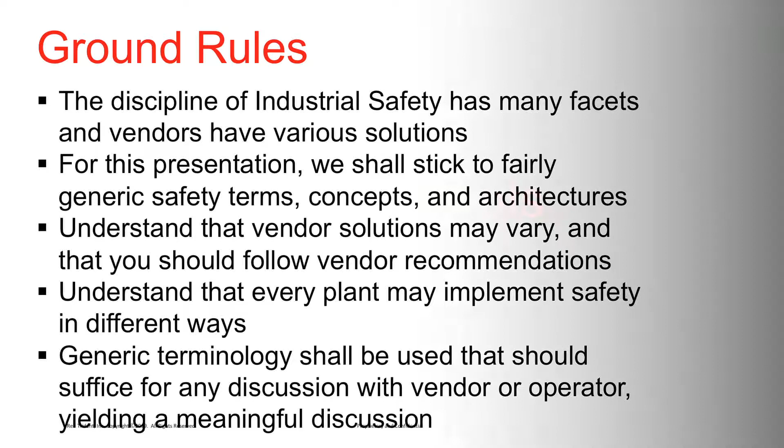Okay, planned downtime, not a bad thing. We say, hey, we're going to shut down for 3 weeks. That's built into the schedule. Everybody understands that's coming, not a big deal. It's the unplanned maintenance that's the problem. That's when you have issues that actually go wrong on the plant: machine breaking, product quality issues, all kinds of things like that. And when I see a company that has a very high amount of unplanned downtime, that's the first indicator to me that they probably have mechanical integrity issues within the facility.

All right, that they have something going wrong. They may have process problems within the facility, or operator training problems, or something of that nature. But that's the first question I look for.

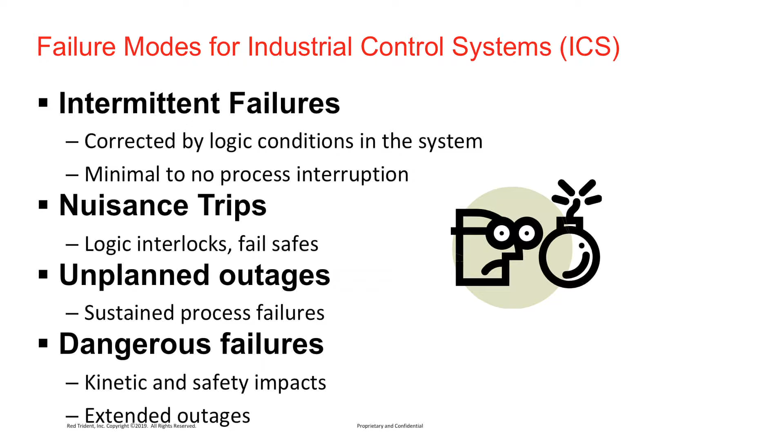And then we get into the worst category, which is actually kinetic and safety impacts, or dangerous failures. Now, I want to make sure we're really clear here about safety. Safety, hold on just a minute, okay? Don't anybody throw anything at me. Safety, by and large, only deals with one thing: entropic hardware fault.

In other words, something happens - it's mechanical, it's not deterministic in nature. Now, I realize all the safety standards say, yes, we deal with systematic fault, yes, we address security. And I look back at them and say, no, you do not. They all say in there in one line, you need to be cyber secure. Boom, that's it. Now, some of the standards are starting to adopt that a little bit.

But process safety, by and large, is just meant for entropic hardware fault, simple things like random acts of nature. Process safety is the process of identifying the probability - again, entropic hardware fault - of failures in equipment and machinery that could result in damage to personnel or equipment, and then reducing that probability to acceptable levels. That's it. It's all math.

So you go in and do a study - a HAZOP study, a hazard and operability study, a process hazards analysis - you do cause and effect diagrams, modeling all the different things that can happen in a process, and you measure the probability of this piece of equipment or system or component failing. What is the rate of occurrence per hour that we expect this device to fail? We call it the probability of failure on demand. Now, you can do that by testing the device.

You can hammer the device for a long time or leave it out there running. Think about it - if a vendor sells 35,000 SIS systems and deploys them all over the world, it's not going to be long before they start getting feedback about how often those components fail. They can work that back into their equations, or from an engineering, design, and testing perspective, measure what this failure is - probability of random hardware fault for the most part - then design the system to reduce that probability of failure per hour to an acceptable level. That's the whole SIL concept, which we'll talk about. Primarily just entropic hardware fault.

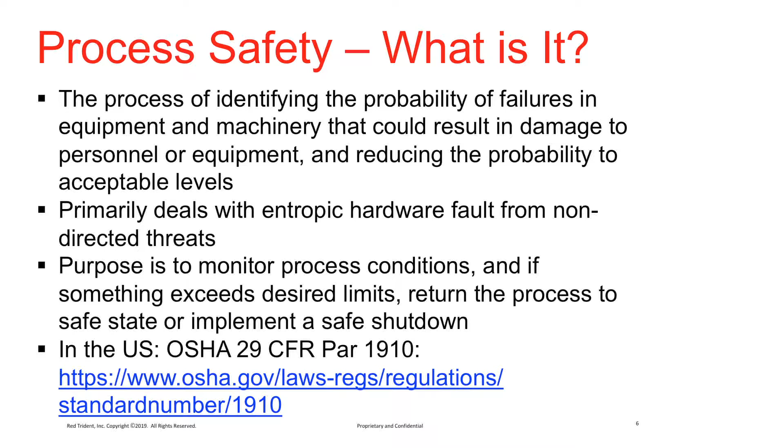Something got said at this show - I won't embarrass the individual, but I'll mention it. Right after I'd started doing a lot of this research, someone who was a researcher in the community said, 'Oh, when the process controller sends the command to the safety system to implement its function...' and that was like fingernails down the chalkboard for me. I'm like, whoa, that's not how these things work. He was doing research on these components at this point. When we talked to him, I said, look, safety instrumented systems monitor the process. They don't interact with the PLC by and large. Now, there are some exceptions in the vendor world, but the safety system monitors the process conditions, looks for unsafe conditions, and tries to resolve them.

So how is this managed? Safety on the whole combines physical infrastructures and safeguards, and process control logic - what we call soft interlocks. A soft interlock would be, say, your PLC logic: if temperature sensor is greater than 200, then reduce the burner, or if machine speed is greater than some speed, reduce the machine speed. Those are overly simple examples, but the idea is you have logic inside your ladder logic, program, or function blocks that measures process conditions and says, that's more than we want, or less than we want, so change these things. That's an example of a soft interlock.

A better example: I was working on a conveyor system with engines on big carts that were moving. There was a light curtain between these two carts - this is where you'll hear the first security issue that comes up. The idea was somebody would come up, the cart would stop, they'd walk all the way around the cart, make changes. So the light curtain would detect there's somebody standing between these two engine carts, and if that condition was true, it would not advance the next cart.

Problem was, there was too much network traffic in the area at that particular time. The signal that there was somebody standing there was never received by the process control device - bad logic, don't get me wrong, but the signal was never received. Carts moved at an unexpected time, and the woman was crushed between them. Thankfully, she actually survived with some minor injuries, but it was an example of where soft interlocks can have bad impact and bad consequence.

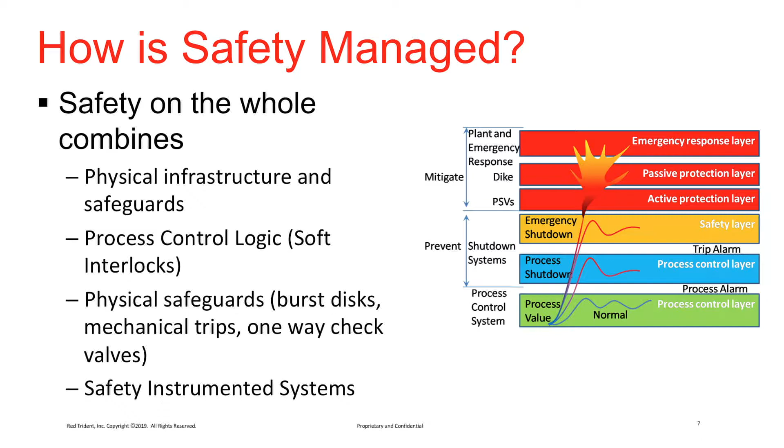Coming to terms with terms, I'm going to hit this really fast. PSM, Process Safety Management. HAZOP, Hazard and Operability Study. BPCS - that's a term we use a lot, talking about safety to distinguish between process control and safety systems, basic process control systems. I don't care if it's PLC or DCS. That separation of SCADA versus DCS versus controller is, by and large, only academic - we make controllers just as powerful as DCS systems now. So don't get tied up into that too much. BPCS works pretty well in this terminology.

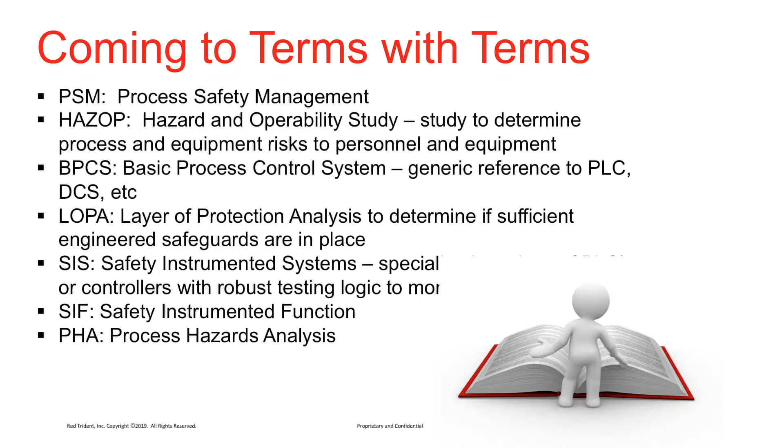LOPA, layer of protection analysis - how many layers and safeguards do we have? Safety instrumented systems, safety instrumented function, or the SIF - that's actually important. SIF is like: if pressure or temperature 1 is greater than 102, then implement the ESD function. Those are fairly simple logic. PHA, process hazards analysis, okay.

Types of safeguards - I always like this. Whenever I see people do the safety thing, I always think 'safety third' - that's one of my favorites. But okay, types of safeguards.

Physical - these are barriers, berms, blast shields, man traps, protective equipment. For example, do we go into the control room, or where the control rods are in a nuclear facility? No, we don't. We have layers of protection between us and that. We don't move them in and out ourselves - too dangerous. We have layers of protection between us and the process.

Engineered physical safeguards - these are the one-way check valves, mechanical burst discs, mechanical trips, mechanical overspeed protection devices. I'm really focused on these for rotational equipment like turbine gas compressors or turbine generators. Here's where I'll throw the first little rock: look at what they're producing out there these days - they're all digital systems now. They're not doing mechanical overspeed protection in turbine gas compressors or turbine generators anymore. And it's like, oh yeah, it's perfectly safe, right?

That's where myself and some folks in this room would be happy to challenge that, so something to be mindful of. If you say the only system we have now going forward is digital, well, it's not connected. Yes it is, it's connected somehow. It's all connected. Don't ever tell me something's disconnected, I will take you to task on it. There's always a way, right? Stuxnet proved that, Triton proved that, several other things.

Either way, whenever I'm looking at rotational equipment, these are the systems out there. We have to protect them very heavily, because if somebody can change the parameters and say it's now safe to run at 100 RPM and then 3,000, that's not a really good idea. It's going to eventually cause problems. But if I tell that system that's okay, it's never going to shut down.

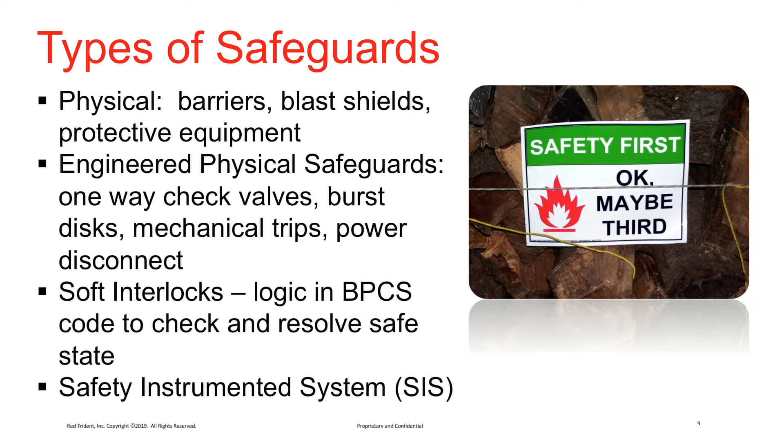Then we get soft interlocks - sorry, I skipped a little bit - soft interlocks, again those are conditions inside the controller, and then safety instrumented systems. Now why do I break those out? Safety instrumented systems are like a very robust and much more expensive version of the controllers you're probably familiar with, so they're not very cost effective to use for every control function. That's the main problem with them.

You don't see SIS a lot of places. The only place you really find it is regulated industries, where plants have opted for very robust protection. In OSHA, there's 1910.119J, if I remember correctly, which defines the parameters for mechanical integrity. So one thing you'll find is, in the United States, it's OSHA and MSHA. In Canada, I think it's also OSHA and MSHA. Outside the U.S., there are equivalent organizations. I'm just using that as one example, but I don't want to list all of them here today.

What we found out is OSHA took a look at the standards ISA 84, 61508, and 61511, and said for your regulatory component of being safe, if you implement per these standards you will be compliant with OSHA. So we have kind of a de facto regulatory requirement as a result of that. In the U.S., OSHA and MSHA, and outside the U.S., different organizations - you do have a requirement to be safe, but it doesn't necessarily mean you have to do it the 61508, 84 way. Those are just one way of achieving that compliance.

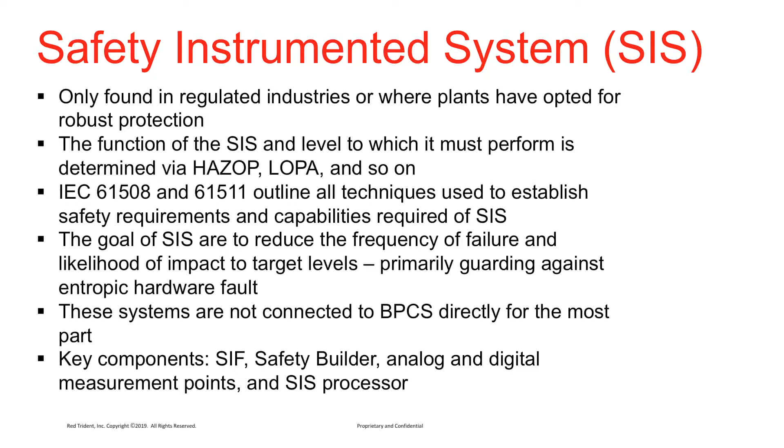Now they have the ability to modify the safety instrumented function, and they have the ability to modify the process control, the process itself. The interesting part is, with safety systems, all you have to do is disable its functionality or give it a new tolerance, and then just wait. You don't actually have to hack the process. You just have to wait for an unsafe condition to occur, right? Remove the safety instrumented function.

Okay, safety integrity levels - this is what we're talking about in terms of probability. If you look at SIL 1, the way safety works, they tried it this way - tried to say we'll make the vendors be more safe. They tried it that way for almost 11 years, and finally said that isn't going to work. We started doing the same thing in cybersecurity - saying we're going to make the vendors solve this problem. That's not really the right answer. It's not either or, it's both and. We all have a responsibility at the table to work on these things.

But from the safety side, they finally went back to a model that said, here's how safe we need to be in terms of reducing the likelihood of incidents within the plant. Now how do we build a more robust process? So we have various safety disciplines, and safety instrumented systems. The plant or process will be rated to a certain SIL level - safety integrity level 1 through 4. And then the controllers and components, and how you deploy them, will be rated to a certain SIL level. There's an entire practice around this to define and achieve the safety integrity level. Those processes are defined in 61508 and 61511 in detail, or ISA 84 covers a lot of it too. They cover all that material in great detail.

The SIL defined - if you look at it, SIL 1 is 10 to the negative 5 to 10 to the negative 6, all the way up to SIL 4, which is 10 to the negative 8 to 10 to the negative 9 - that's the probability of failure per hour. So if you establish that these machine components together have a probability of failure per hour outside of these tolerance windows, well, we've got a problem. We've got to do something to mitigate it down to the level we want to achieve.

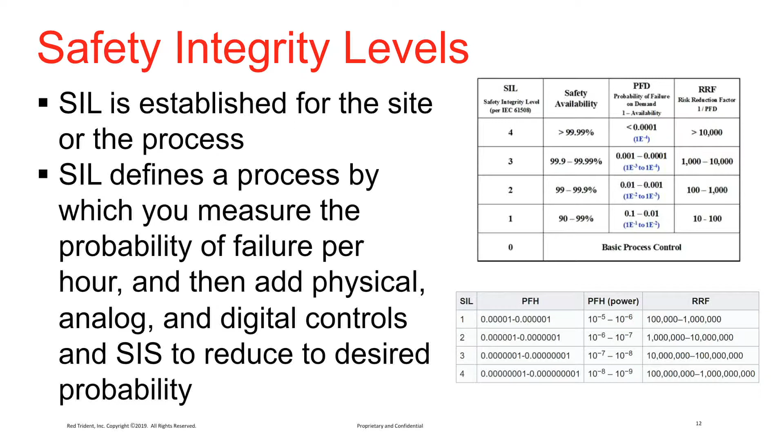LOGIIC, the LOGIIC project - anybody been involved with the Automation Federation and LOGIIC? Marty, don't raise your hand. So anybody been involved with that?

I had the ability - I was involved with it at phase 2, when we specifically were testing safety instrumented systems at various levels of integration. The reason for this is that right at that time, several vendors were starting to sell converged safety systems with process control. They're still doing that today. This study found that was kind of a bad idea. I don't want to speak too much for it - you can read the results yourself. Andre, you can't raise your hand either, right? But they, by and large, found that this level of convergence was a bad idea.

Now, as everything in the security world, it kind of depends. If you tell me this is the only way the solution is going to work, we'll find a way to make it relatively secure. But by and large, putting those safety systems together was pretty much a bad idea. And I think the Trisis malware that came out against the Triconex component is a really good example of why you don't want these things talking to each other in some way or another. You don't want your safety systems connected.

Unfortunately, I find safety systems way too connected, way too much of the time. And I'm like, look, if I can get into the safety system either through fraud, collusion, or people there at the site, or even remotely - which I find remotely, unfortunately, way too often - and I can get in the engineering workstation, I've got all the keys to the kingdom. I can do anything I want at that point. I just need to understand the physics of the process, and I can cause all kinds of damage, right? And Trisis implemented all this in terms of malware.

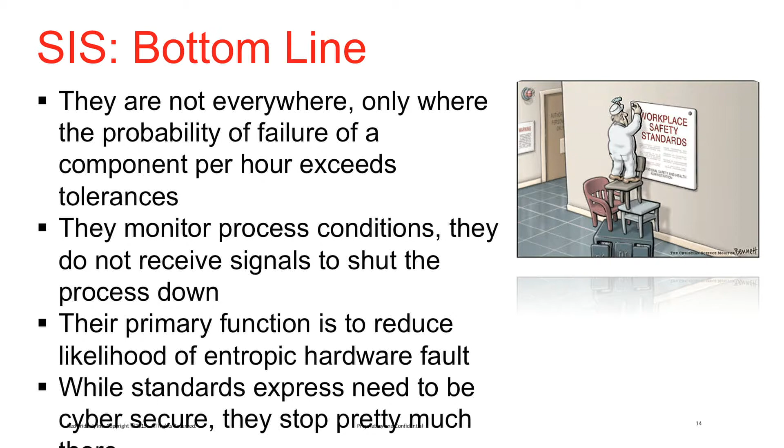Let me hit this really quick. Some of those standards out there: ISA 84, 61508, 61511. In the ISA/IEC working groups, 62443, previously known as ISA 99, we have working group 7. Then ISA 84 on the safety side has working group 9. They're both dealing with cybersecurity of safety systems.

There's the API 1173 for pipelines. OSHA and MSHA have 1910.119J, and I don't know the equivalent on the MSHA side anymore, or outside the U.S. They're still really good references. If you're not from the U.S., you're going to have an equivalent in your country.

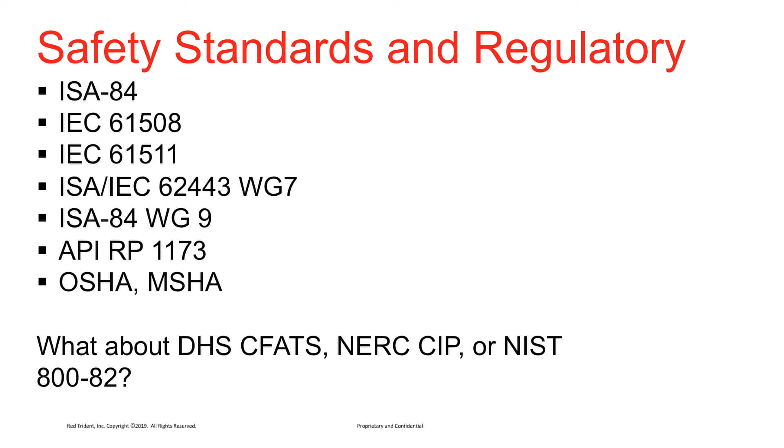But what about DHS CFATS, NERC CIP, NIST 800-82? Are those safety standards? Think about it a minute. ICS security and safety both share a common goal of preventing dangerous failures. Those cybersecurity standards still have an implied component: when you're doing an analysis or a CVA, a cyber vulnerability assessment of a process, you're identifying dangerous failures.

I like the last one on scanning those components. I loved your comment, man, Jason, about how you may have a low here, but what if this low could be used to exploit a condition within the process that's actually very high?

You cannot stop at the CVSS score. You can't stop there. In fact, when I do a penetration test, I specifically avoid using vulnerabilities—there's only one or two I'll use to crack the case into the system. After that, I go native protocol. That's it, that's how I do pen testing.

I don't like going after it because I want to prove this point: there's no point in the CVSS stuff. Once I'm on the system, it's over, because I'm using stuff native to the system to do it. But anyway, we have common goals.

So, plenty of cases where the probability of failure from a hardware perspective is too low for SIS, but for safety, for security, we want to put it in there anyway. So by and large, it's best not to connect them.

So when evaluating—trying to wrap this up quickly—if you're doing a CVA, or if somebody's doing a cyber vulnerability assessment for you, evaluate the cause and effect diagrams, the C&Es.

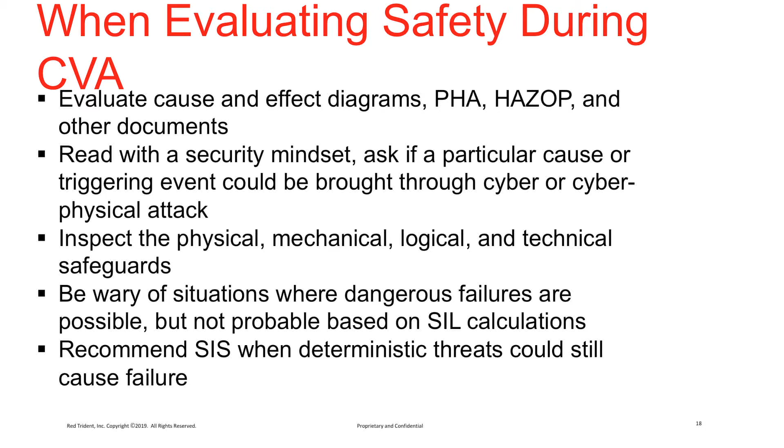Key takeaway: soft interlocks and basic process control systems may be insufficient. They are insufficient for safety. I say may here, but I'll say are to the rest of you. Bad idea: if your safety strategy is based upon logic inside of a processor that somebody can download or change, or mask set points or change sensors on, which that kind of stuff we do in the penetration testing and hacking community all the time, you're asking for trouble.

SIL calculations may fail to identify cyber scenarios where SIS may be beneficial. SIS can be a last line of defense, but must be isolated from the network to be reliable. So it's just a matter of good architecture. Again, just because you can doesn't mean you should.

That refinery I was talking about, I found the safety instrumented systems through a vendor-connected website. They had their own embedded engineers on site. They had their own connection. I got sniffing around a little bit, found their own connection out, came back in, no protection, and guess what? I found the safety systems as well because they were connected to them so they could make changes to them because they didn't want to have to walk across the plant either. Just because you can doesn't mean you should.

With that, any questions? Sure.

In the Triton case, Schneider made a big deal about the fact that the key should be turned to the don't make any changes position. What do you think of that?

So that's a recommendation. All the way from back when we started this field, I was working at Rockwell. That was the first thing we always said was put it into the run state, right? Now, there's a couple problems. It's really easy to make that recommendation. Number one, we've been able to override those conditions in a lot of different controllers. I'm not making a comment about any particular system, but I've been able to override those conditions quite a bit in some of those. Not all of them have those switches as well.